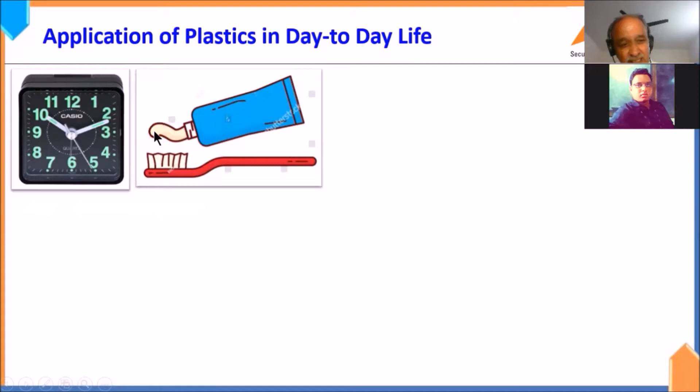In the morning, a person wakes up, and you may see that the clock shows 10:10 because that person has had a long day into the night, so he has set the alarm at 10:10 probably. It's completely made out of plastic. Then he brushes his teeth using nylon bristles and a plastic handle, and the tube containing the paste is also made out of plastic. And then he takes a hot cup of coffee in the plastic mug.

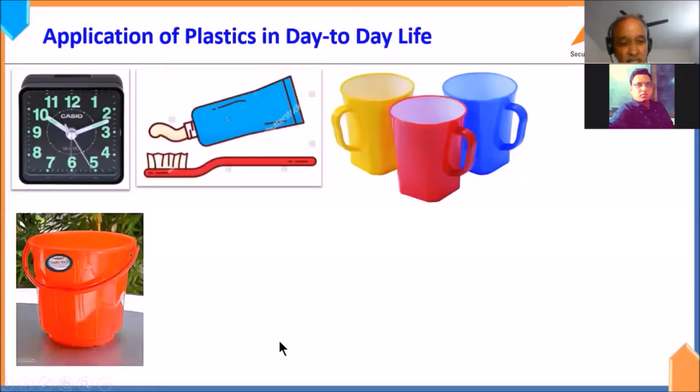And then he goes for a bath. This is a plastic bucket, he uses a plastic mug, and of course the soap case is made out of plastic. And he uses his cell phone extensively, which is made out of plastic. And the material of the clothing that we wear is probably mostly out of synthetic material. And the shoes that we wear, these non-leather shoes, are made out of high-strength fibers of plastics.

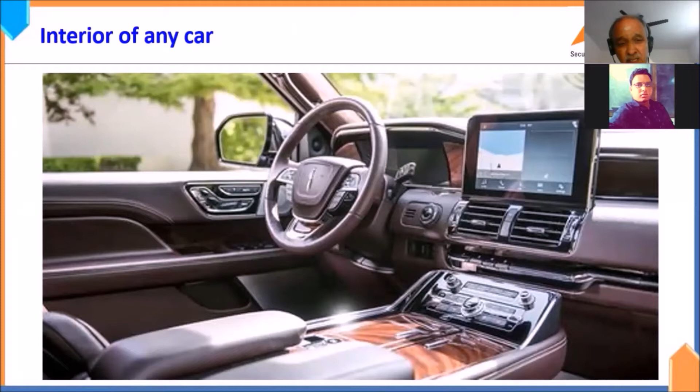Thus, we come to a conclusion that it is impossible for us to lead a modern life without plastics at all. And if you open the interior of any modern car, you will find that everything is entirely made out of plastic. And if you completely dismantle a car and put it out like this, excepting the body parts which are made out of sheet metal, most of the parts are made out of polymer, including rubber.

And what are the advantages of plastics? Why is it that plastics is the most preferred material? Because of several reasons. One is it has got lower density compared to steel, for example, or metals. So steel has got a density of 7.8 specific gravity, whereas this is just around 1. And you have to protect steel against rusting by painting or plating. Here, you don't have to do anything at all.

And if you want to improve the aesthetic appearance, it could be painted, and it could be made transparent with some special materials. It can replace glass at a lower weight, giving the same transparency for headlamp hoods. And they are very easily processable because of the lower melting temperature. And they are durable for the life of the car, absolutely no problem at all.

Earlier, we used to have bumpers made out of steel. That was thought to be a protection for the car. But then we learned that we need a material which will have high impact toughness—when the impact comes, it will absorb the energy and spring back to its original condition. That is why the modern bumpers are made out of plastic, and they can be joined easily by welding.

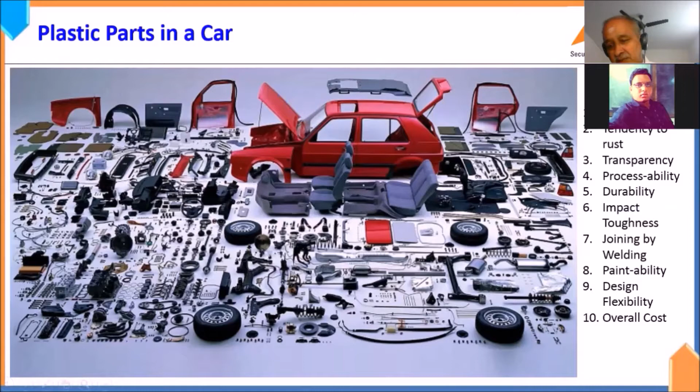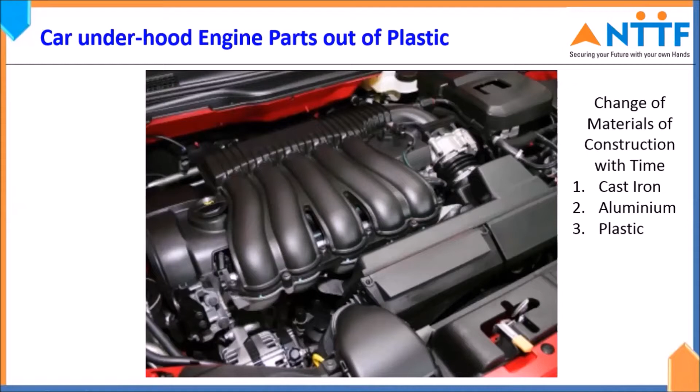Now, if you open the bonnet of a car, you will see so many parts made out of plastics. Earlier, they were made out of cast iron, then we changed them to aluminium. I started with Bajaj Tempo, the manufacturer of four-wheelers, in 1964.

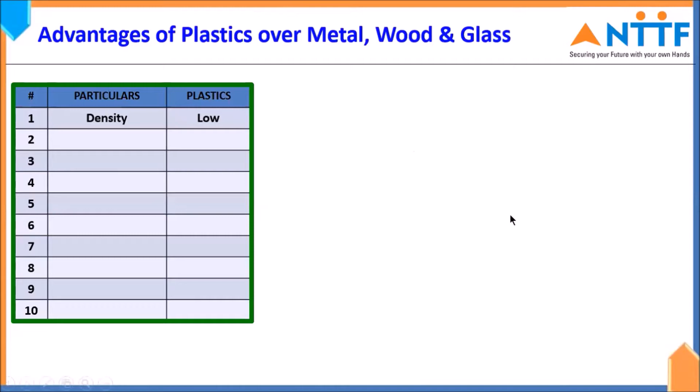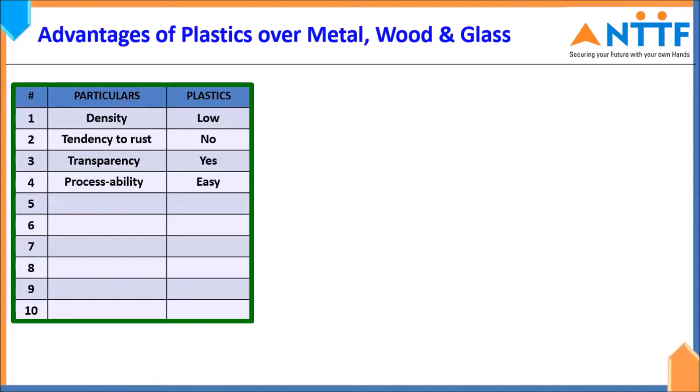So I saw the gradual changeover of materials from cast iron to aluminium and then to plastic. What are the advantages of plastics over metal? Density of metal, let us say steel, is 7.8, whereas plastics around 1. So tendency to rust is not there at all, transparency possible, durability quite sufficient for the life of the car, lifelong I would say. Impact toughness is excellent, joining and welding is very easy. Paintability is not required most of the time, but if you want to enhance the appearance, it can be done. And design flexibility is superior, and overall cost much lower.

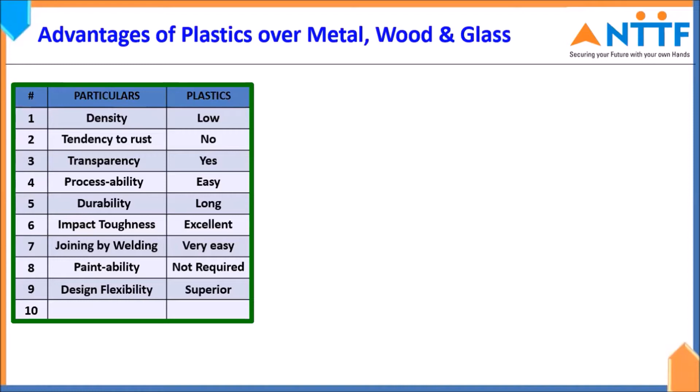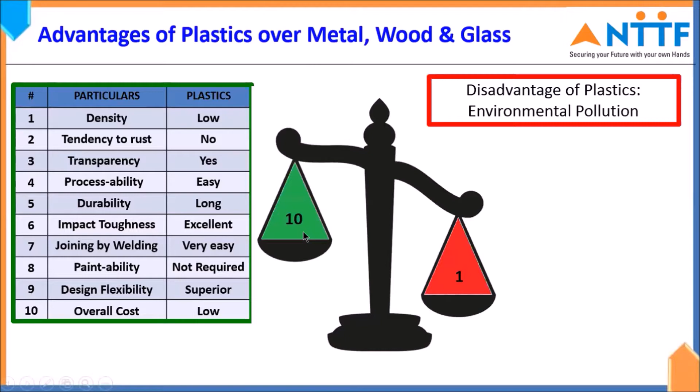So these are 10 advantages. There are many more, I just selected randomly 10. One single major disadvantage of plastic is after its use, when it is discarded, it creates environmental pollution. So there are 10 advantages and one countervailing disadvantage. This outweighs that. Now we'll see one more slide before I close.

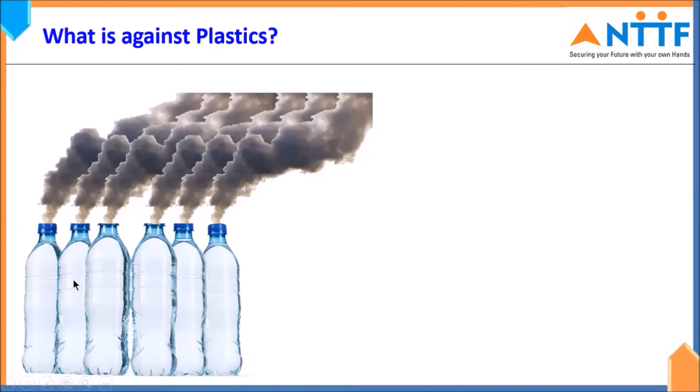What is against plastic? The low cost, use and throw away plastics only cause pollution. It is not the high cost, high value plastics used in cars that cause pollution, they can be reprocessed easily. Whereas the low cost ones, made in millions every day, end up in oceans and waterways and cause major pollution. This is something which is subject to research, and one of these days we will be able to address this satisfactorily to the satisfaction of the whole mankind.

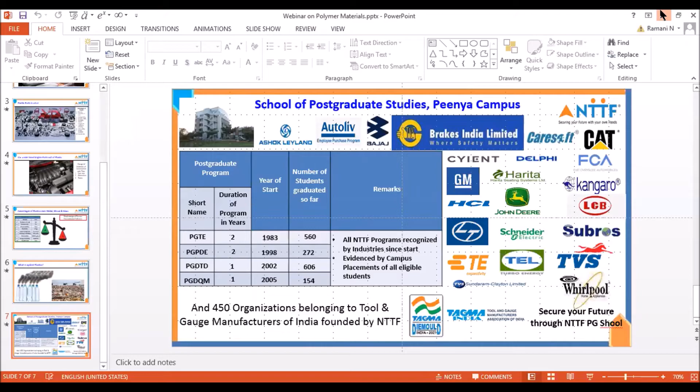Hello, good morning to all participants, and thank you for the wonderful introduction and very good cue from Dr. Ramani. So I consider it a good opportunity for sharing some analysis on this particular topic. I'm going to help you think or analyze how the selection of plastics can be made, so that has got a journey to make. In the course of another half an hour to 45 minutes, we'll be covering it, and I would be able to give you the way how we can do it easily.

As Dr. Ramani put it in the earlier session, plastics had been used in almost all applications. It is difficult to identify any sector where plastic is not used, except eating. You have used plastic everywhere. There is no single minute in our life, at any time in the day, that we don't come across plastic. Plastic had been so much used in the atmosphere around us, whether it is medical, footwear, packaging, building and construction, electrical accessories and electronics, transport, agriculture. In all these sectors they are used. Obviously, there must be properties which are really beneficial for using in all those sectors.

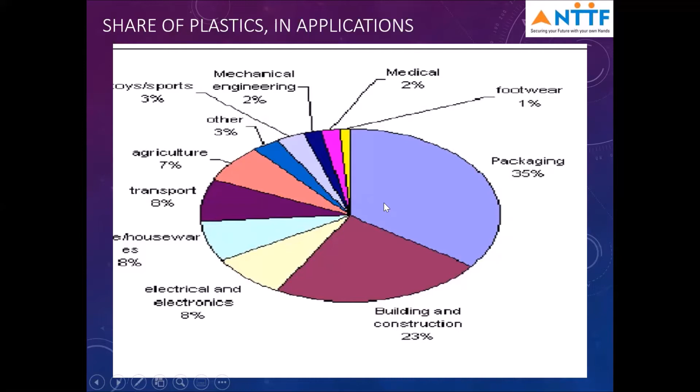Whenever people design a product, it is always a challenge to select the correct material. If plastic had been occupying these applications, there must be properties which are friendly. And of course, as put in the earlier session, in some applications, because of excessive use and to an extent a kind of irresponsible abuse, it is creating a lot of ripples in society. It's only a question of getting alerted, and of course technologies are developed to reprocess those materials. Let me not get into that particular area, which is interesting but has a lot of controversies. So why should we use plastics?

Already a lot of the features are listed. Something interesting is that plastic has highly complex part geometry you can design, a very complex part geometry. There are some part geometries which, if you don't use plastic, you cannot manufacture that part. Plastic is the only choice. So that way, that gives an advantage. And with the level of technological growth now, with the advantage of CNC, CAD and CAM, where a design can transfer from different points even across the world easily, the complexity is no more an issue.

A lot of efforts are made to develop plastics in a very interesting condition. There is one point about hygienic and clean room atmosphere parts. Now in COVID times, we are more worried about growth of germs and viruses. It is possible to make plastics which can resist that kind of atmosphere, that kind of threat or attack from virus and bacteria. I will tell you later how this is being addressed now.

The other properties are already known. One thing fundamentally we have to realize is, if any geometry you are designing by a plastic part, there can be no other material which can give you that at the same cost. So for any geometry, plastic is the cheapest option, provided you know the advantages of plastic and the constraints.

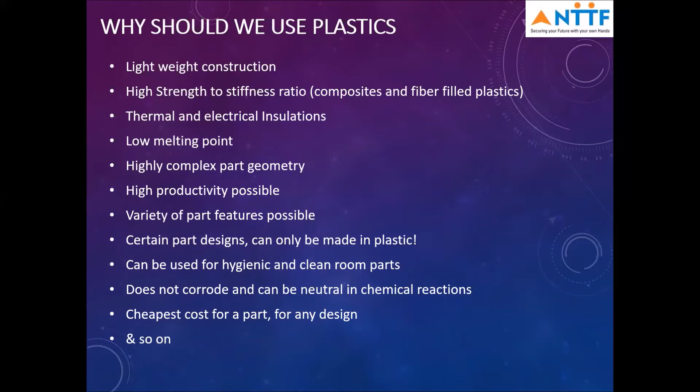Suppose you want electrical connectivity between two points, then it is not a good idea to use plastic, because plastics are insulators. And if you want heavy weight added, plastics may not be a choice, because plastic is a lightweight construction. Suppose you have an application with high temperature involved, 150, 200 degrees centigrade atmosphere. Then there have to be special grades of plastic, or you have to go for alternative choices of materials.

Let us see down now, I'm going a little faster. When we try to analyze plastic, actually a big group of plastics are available around us. We have seen many applications. For our sake of simplifying things, we have to start classifying.

So any basic volume of material you have, the best way to select what is suitable to you is to classify as much as possible. It is something like in a classroom when the students are there, we will classify students into categories like boys and girls, or localites and people from outside, or students who score more than 80, or 60 to 80, or 40 and above, and those who have a tendency to fail because they have some similarity within them.

Here we say commodity plastics is one kind of application. Engineering plastics is another category, and special performance or super plastics is another category. Let us see what is the exclusivity there. If this classification is clear, when we are selecting, we can lay our hands on the right type of plastic that is suitable for us.

Commodity plastics are known because they are low strength material. You can almost break them with less force, and they have a low melting point. What does low melting point do? It leads to better processability, meaning you can supply less energy and melt it. It is a low cost material and easy to process. Overall, when the processing is easier and the material cost is lower, the part cost will be the cheapest.

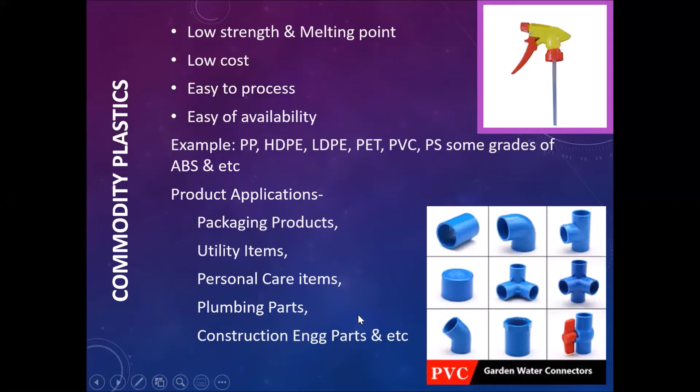Construction engineering parts, where houses built these days are using excessive plastics. Engineering plastics, with respect to commodity plastics, have high mechanical strength and are relatively expensive and difficult to process. Because of this, the part cost goes high.

So there, the category of plastics are fairly expensive, and they can be said as nylon, PC, POM meaning polyoxymethylene, which is also called acetal in the general market, and polyphenylene sulfide. I have only listed a few which are frequently around us.

Nylon, if you know very well, was launched by DuPont several years before, and this very word nylon actually means New York to London. So they made a fiber. The persons launching it said to the world, we can make one fiber which covers the distance from New York to London in a single stretch. That is why they named it nylon. So nylon became a very familiar material as far as fibers are concerned.

Nylon fabrics came, and it is a very thin material that can be drawn into thin fabrics. Engineering plastics are used in connector parts, automotive engineering parts, instrumentation parts, where you have strength as well as a little focus on cost. But in commodity parts, cost is the primary criterion.

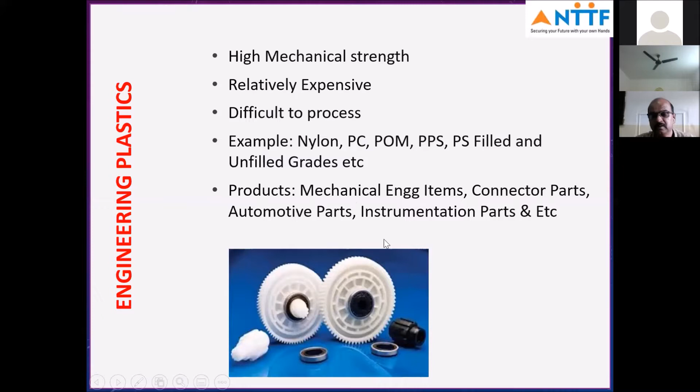You have already seen so many parts being used in the car. It is increasing on a daily basis because plastics are being developed to handle a lot of the complications of atmospheres in that.

Then comes special performance plastics, also called super plastics or high engineering plastics. These plastics are specially categorized because the properties are exclusive and customized. How do we customize? We will see a little later.

I will share one or two pieces of information later. They have got strong thermal properties, meaning they can withstand a little higher temperature. Imagine an exhaust of a vehicle is now manufactured using a particular plastic - exhaust temperature of gases are very high. Earlier it was considered only a metal domain; now that is replaced by plastic.

The advantage of using plastic is not because it can withstand the temperature, it's because of the reduction in weight. Always in a vehicle, the target is to reduce weight because weight reduction brings better mileage and less fuel consumption. That is what the world is thinking. So if plastic is not the material there, no other material can fill this space.

Customized properties are possible with these plastics. They are difficult to process and they are expensive. They are all special performance plastics.

Some of them, if I can tell - PTFE, most of you must have heard, is actually used for non-stick pans, this is the coating they do. And polyether ether ketone (PEEK) is a very special grade of plastic, but they are very expensive.

Expensive means I can give you an idea - it will cost somewhere around 2,000 rupees per kg. Commodity plastics will be somewhere around 40 or 50 or 80 rupees per kg. Engineering plastics will be touching around 200 rupees per kg at current prices. But PEEK and PTFE will be somewhere around 2000 rupees plus.

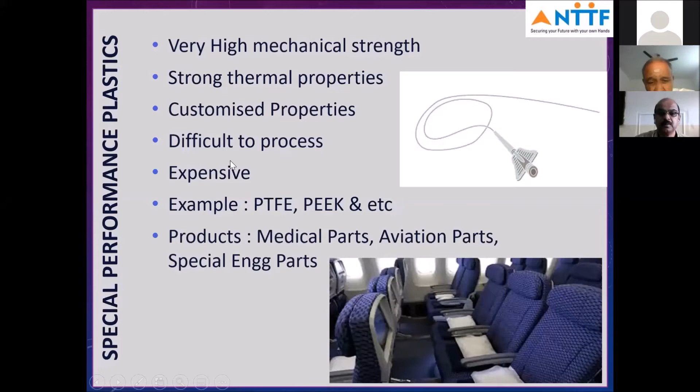In thermoplastics, we have two main categories: amorphous and semi-crystalline. Amorphous means all the fibers are randomly arranged; semi-crystalline means they are similarly arranged. Based on these two, certain properties emerge - for example, light transmission. In amorphous material, photons do not get reflected back, they pass through. In semi-crystalline material, the crystal arrangement reflects light back. Amorphous material, when melted, has a longer processing range because it doesn't change phase. Semi-crystalline has a phase change - when you cool it down, at one point it solidifies and you cannot process it further. So semi-crystalline has a narrower processing range, which influences your selection of plastic.

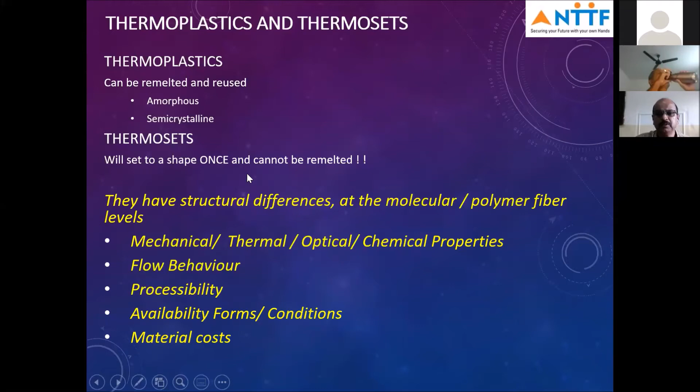So this is one kind of classification we've seen - the earlier one was a diagrammatic representation. Look at the range of thermoplastic parts you can make: knobs, caps, and bottles, all from the same input material in grain form. Look also at trays and chairs - all these parts are made from the grain form.

This material can be colored - plastics can be colored. Imagine a house with 10 people, all keeping soap trays and using the same soap. How do you separate which soap is yours each day, so it isn't used by somebody else? The same tray can be made in different colors, and that way you can differentiate them.

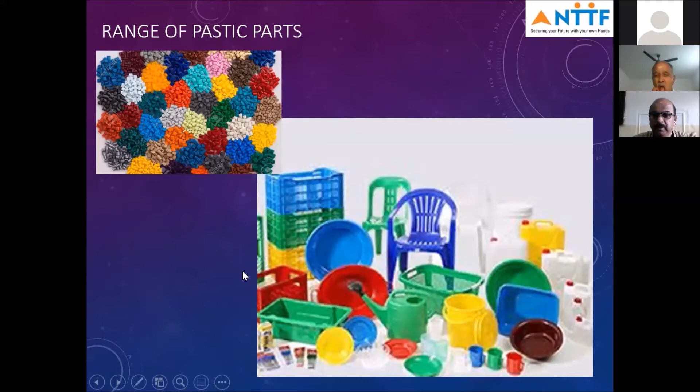Automotive connectors - the connectors electrically conduct signals. The connector used for operating the light should not be used to operate the sensors or the wiper. When you want to put on the light, the wiper should not come on. So you can separate and differentiate by coloring the parts. That is advantageous.

Look at this part - this is a commodity item, a comb of different design. Can you think of this feature in any other material? In earlier days, combs were made of ivory, so one comb would cost several thousands. Now it's banned, as we know. People like Veerappan killed elephants to collect ivory.

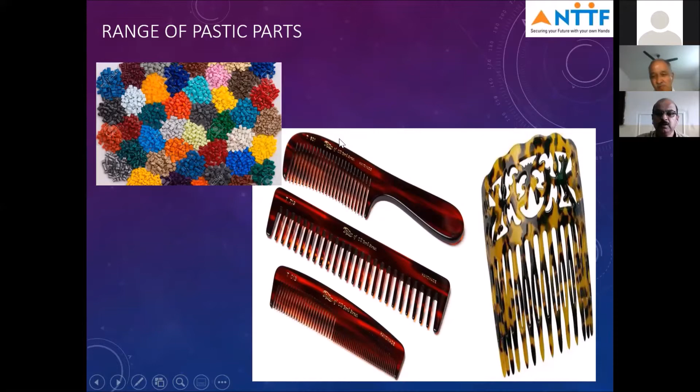Look at this - some are engineering parts: a telephone headset, cables, specs, balls, spoon, bottle, and zip - all plastic. This is another category, all with raw material in grain form, though some will have intermediate forms in between. What I'm trying to say is plastics are so pervasive that there's not one minute in our time we don't come across them.

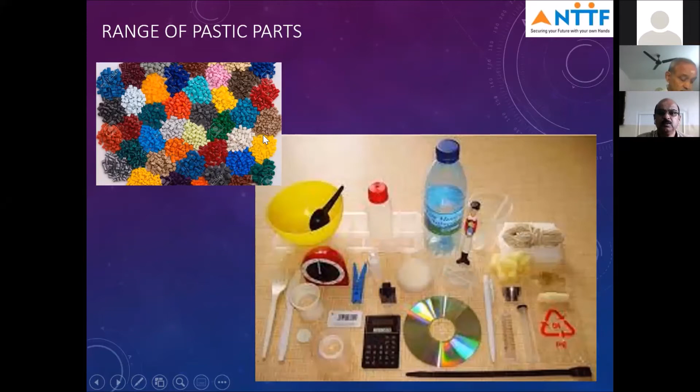This category covers thermosets and elastomers. Thermoplastics are those you can remelt and reuse. Here, this is a material category called thermoset - you apply heat and it gets solidified. This is rubber material.

This is the same thing. You apply heat, you can change the shape, but you cannot change it again - they are set to the shape. Maybe you can cut them and use it as waste and scrap material, or for road pillars or construction applications, but that cannot be reprocessed like the earlier category of plastic called thermoplastics.

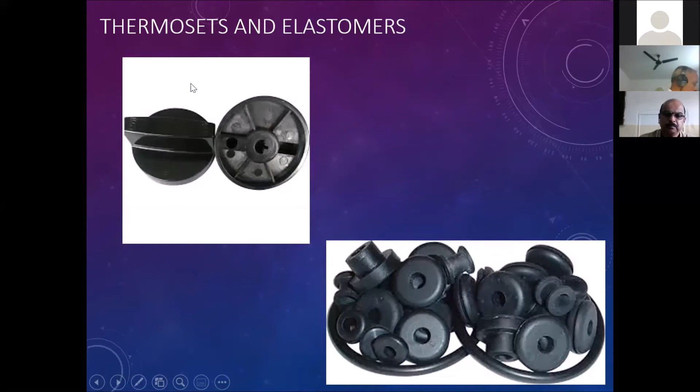The product designers have to provide this in a place where you are not going to make it functionally disabled.

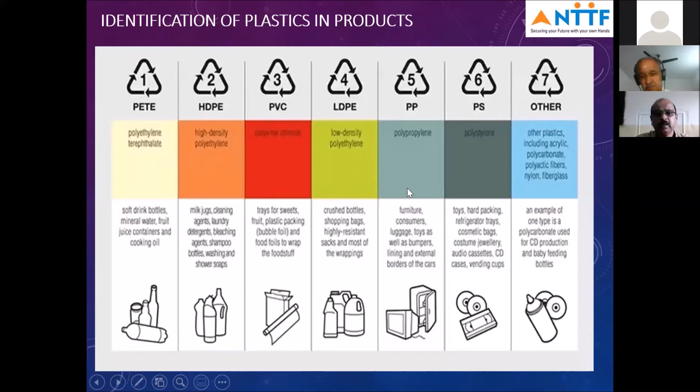As I said in the earlier session, the structural arrangement inside will change the properties of the plastic. What is it leading to? It gives different varieties of plastics.

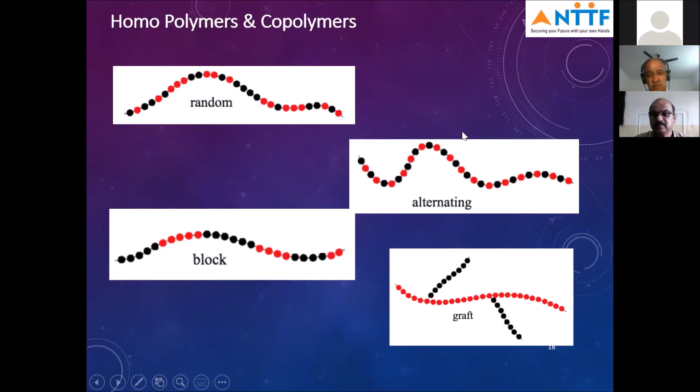Polymers after polymerization are not fit for use - directly, they are not fit for use. So we will have to make them useful. For that, material engineers are adding additives. There are some interesting additives.

Anti-counterfeiting is possible - suppose you are manufacturing a part suitable for medical use, where the material is special plastic. If the vendor is changing the material, you can have a coloring tag or an RF tag on the material, so when you process it, you can check the part for the presence of the tag element. So you can do anti-counterfeiting, and antimicrobial so bacteria will not grow.

You can add antioxidants, which will actually reduce oxidation. Anti-static - ESD is a bigger issue. Static electricity is very dangerous in many products, especially electronic circuits - that kind of shock, an electrical surge, the products will not be able to handle. So the plastics, being insulators, are basically static-electricity friendly, and you will have to make them compliant - you can add additives to make it ESD compliant, static electricity compliant.

Then you can have blowing agents where you want to blow the material into a bottle, a lid, or a can - you need the plastic to be stretchable, so you can have blowing agents. You can add lubricants inside the fibers so that they will flow well. You can have colors, and you can have processing aids, because plastic can be processed in many ways, which we'll see later. So for all those, there are definite properties required in the plastic.

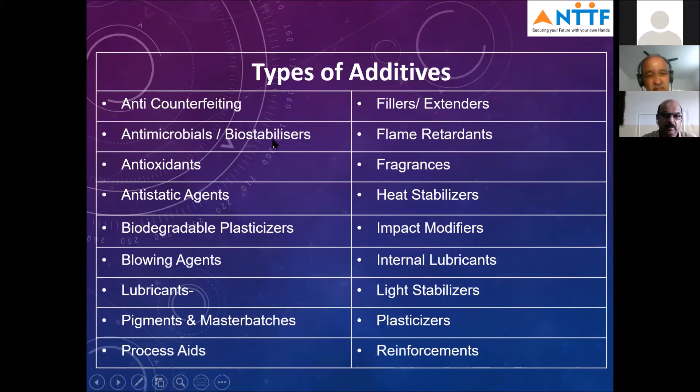Polycarbonate is a tough material. You can add some soft material like acrylic, or you can add a hard material. So optical transparency as well as polycarbonate's impact toughness will come together in the product. Like that, you can blend the polymers.

But of course, we will have to look at whether they are compatible. All plastics cannot be blended with all kinds of plastics. We will have to rate them on compatibility.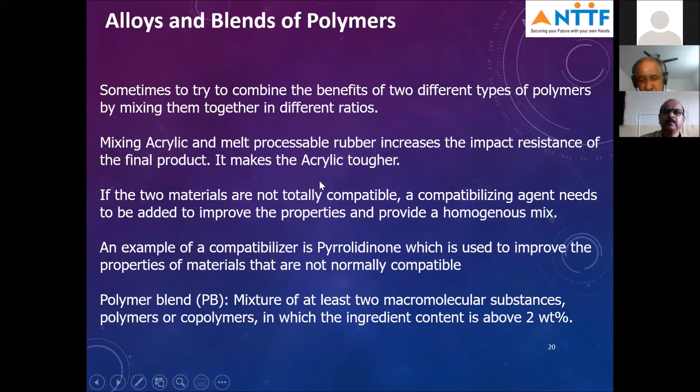So how are we processing plastics? Now we know very well that varieties of plastics are available and they are classified into different categories, each with distinct properties. So almost all plastic processing methods have similar approaches.

You heat the plastic, particularly thermoplastic, and you are ready to give it a different shape. In that condition, you cool it and it settles, and the shape will be retained.

So if you force it with injection into a chamber and allow it to cool there, it becomes injection molding. If you take thermoset plastic materials, load them into the tool, and start polymerization, it becomes compression molding.

And if you heat the plastic so it becomes soft, at one point you can blow air, and the plastic will expand like a balloon. So bottles are made with this process, called blow molding.

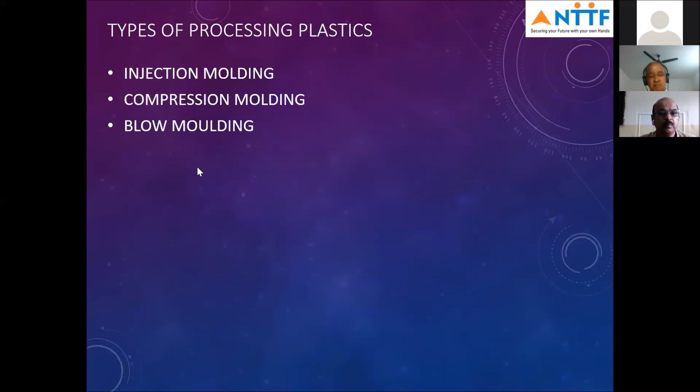You blow air. Thermoforming means you are giving a shape to a sheet of plastic, which is manufactured by extrusion. That sheet is actually given a shape.

So thermoforming is a process where we heat the plastic sheet and put it onto a die, then suck or blow air. It will take the shape of that die we have made.

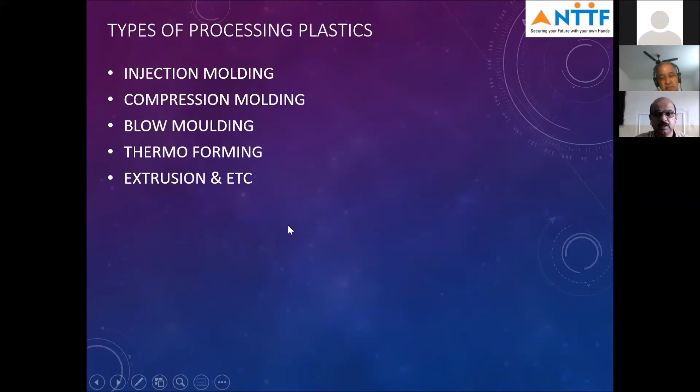So thermoforming and extrusion give different sections. Otherwise, without extrusion, we would not have had so many cross sections of PVC available for construction applications. There are many more varieties, but I'm only limiting to this particular one.

So why is injection molding more preferred? Because if you look at almost all the parts, injection molded parts represent the largest variety of plastics produced and consumed. Even though weight-wise they are less, in value terms, volume, and varieties, injection molding gives the advantage.

So you can produce from simple to complex, rigid to flexible, transparent to opaque, small to large. You can have parts with holes or with spring action, like a mobile cover, or a bottle with a lid. These are all simple and complex parts.

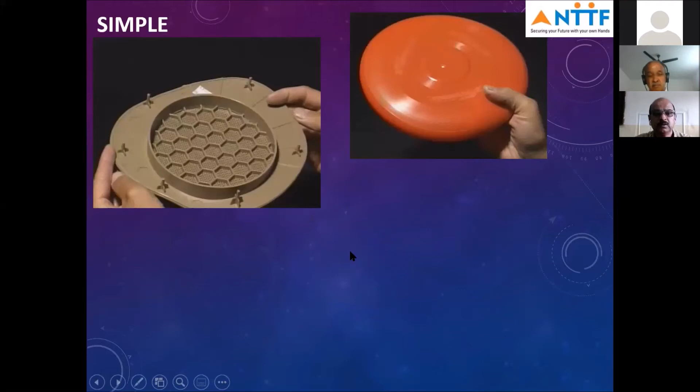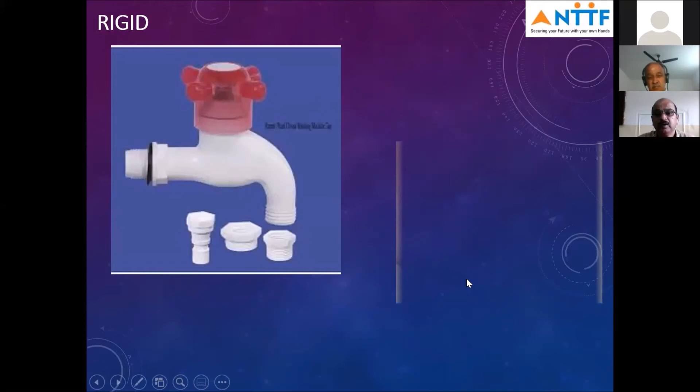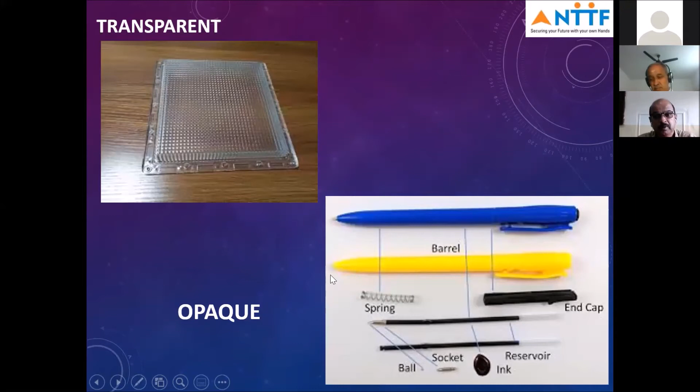These are all colored parts of a pen. You can have transparent ones too, all molded by injection molding. And then small parts used in watches, these are all used in instrumentation.

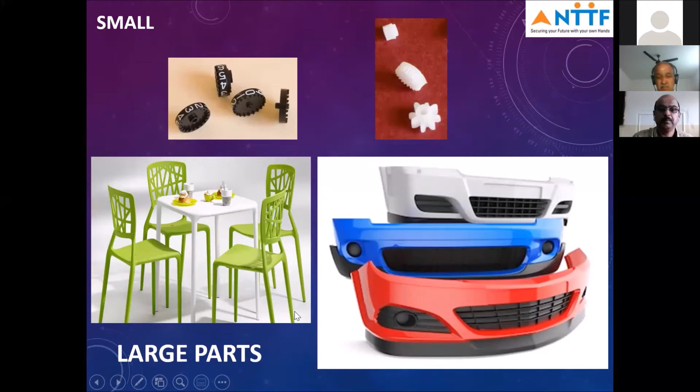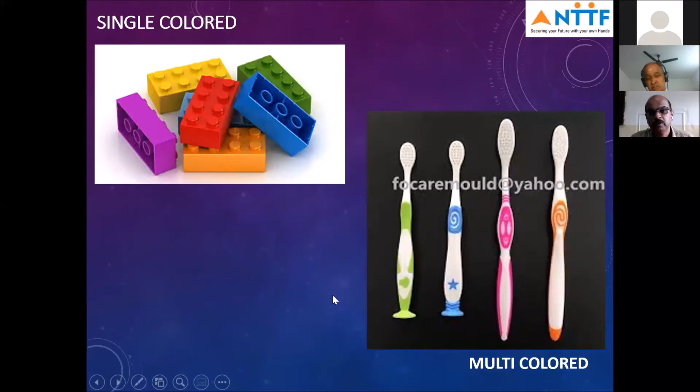Then comes single color Lego blocks, shown here. All of these are with different materials, and this is multicolored, meaning in the same part you can have two materials loaded into one.

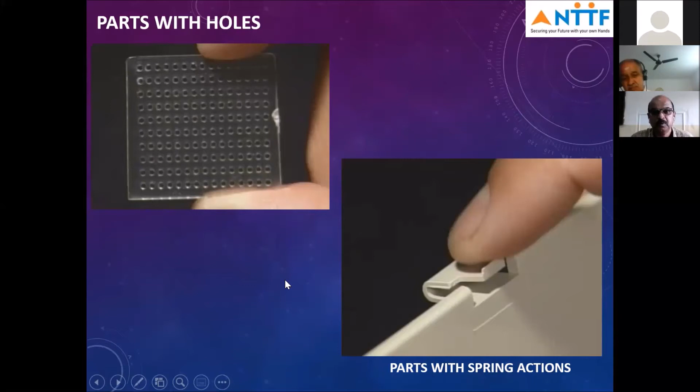Then come parts with holes, like filters, and this one has spring action. So these are all injection molded plastic material. So what does injection molding mean? In simple terms, melt the plastic, force it into a chamber shaped like the part, then allow it to cool.

That will give the part its shape, so when it solidifies, the shape of the part will be set. Of course, there are issues involved. Not everybody can design a tool because it has to prepare the material and give the shape of the part, whatever the design looks like. So it's a very complicated, very challenging, and very interesting field as far as injection molding tools are concerned.

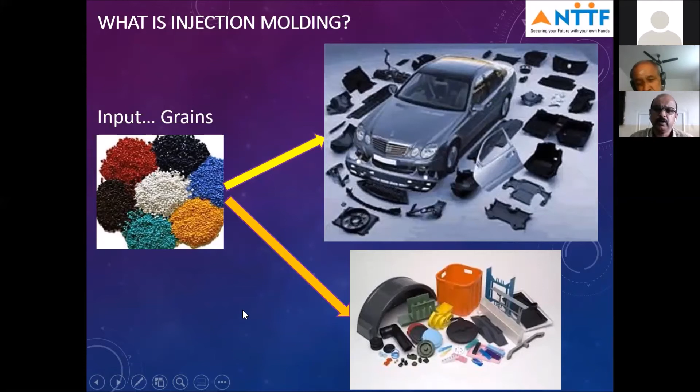Injection molding means melting the plastic granules. The granules you have seen here are the input material for injection molding. They are all melted by the machine, which becomes a plastic melt, ready to flow like a liquid, and that maintains a consistent temperature.

Then you are forcing it into the cavity in the tool. The impression of the part, a replica of its shape, is created in an arrangement of the tool. Sometimes the tool is so challenging and so expensive that some tools cost more than the machine. The machine may cost 40 lakhs, while the tool will cost somewhere around 50, 55, 60 lakhs. That is the type of technology that goes into the tool.

Tool building is similar to building a machine these days. Why has it developed like that? Because of the development of molding tool technology, designers are able to think of wonderful shapes for the plastic part, and because plastic can take those shapes, it is possible to manufacture the part. So part designers have got no limitation now. They can design anything, and the injection molding tool can help them manufacture that.

After filling the cavity with the high pressure material, you cool the melt, because plastics need to be cooled for solidification. Of course, there are issues like the size of the molded plastic versus the size of the solidified part being different. Tooling engineers take care of these size differences and maintain the tolerances, and you can produce in mass. There are situations where the tool produces in one shot 128 small parts—so much of that technology it can take on.

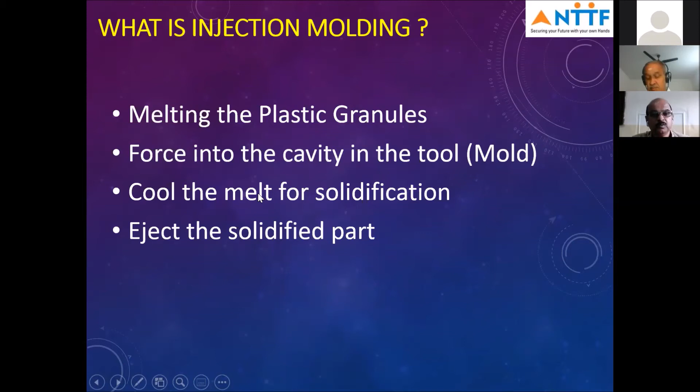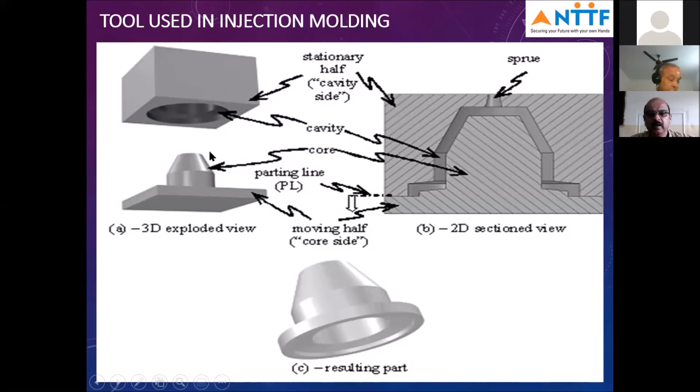The tool cools the part, and after opening it, you can eject the part like this, so the finished part will be of this shape. This is a simple conventional example of how the tool works—this is the core area, which gives the internal details of the part.

On the top side, you have the external details of the part. It's called the upper side or lower side, or the fixed half and moving half with respect to the machine, because this half moves every time while the other is fixed to one plate of the machine. There is a pocket here with an ejection mechanism, so after the tool is opened, the part will be ejected.

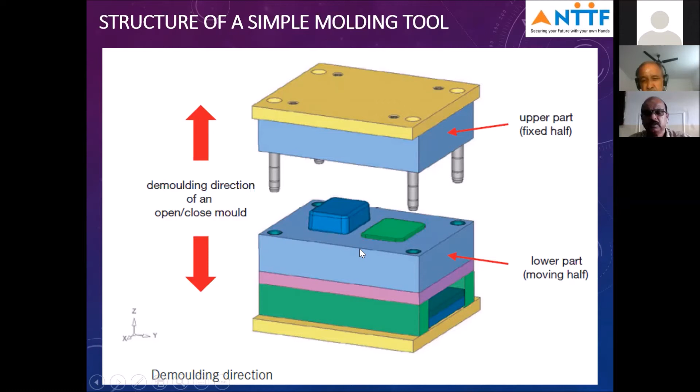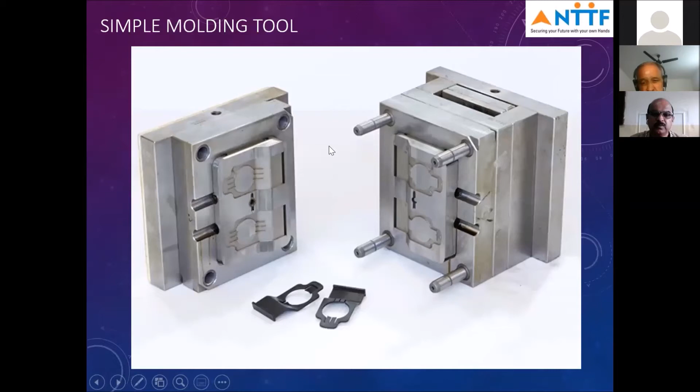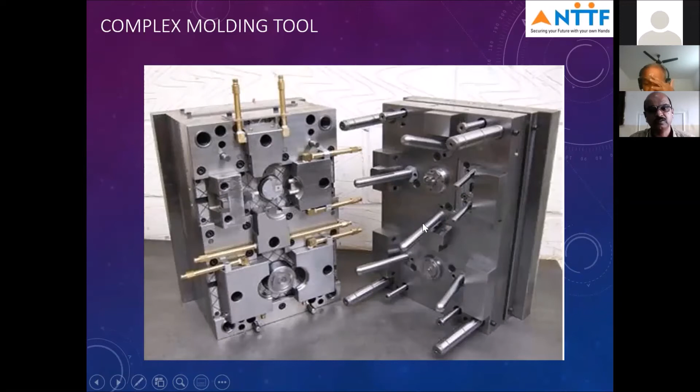That is why I said tool making is not a simple activity. It's a special process. But as a process, you need to know.

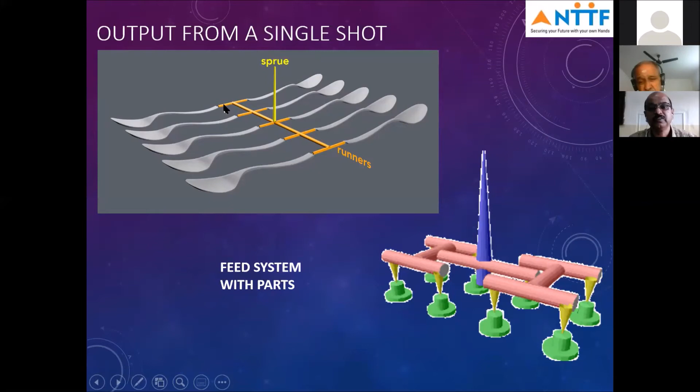So this is actually a mold of a thermoplastic. This is the spoon manufacture. This is an area where the material enters into the chamber, and this is called the sprue. This can be recycled, that's what I said, we can reuse them. So that is the advantage of thermoplastics.

Then comes, now let us come to the final stage. It is almost reaching the final stage of the matches. I told you more than 30,000 types of plastics are available. Is it an easy choice? It's not going to be easy. But the categorization, the study of the property, the study of the application will help you better.

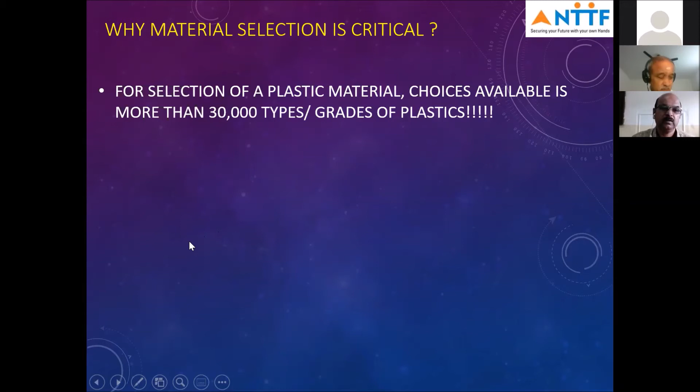Let us see what is the way we can do that. Whenever we have got so many choices, I remember one situation. There was a textile company which was very strongly contending in the market. They launched men's fabrics for pant and shirt, trousers and shirts, with more varieties than the market leader. The market leader had only 3 or 4 colors of pant material, these people launched 10 colors.

But actually, you know what happened? The people, because the choice was too many, stopped selecting it because they were not able to select. But the company offering only 3 colors, they were able to get that. So what I'm trying to say, when you have got more materials, your choice should not become complicated.

But there is a science to select. There is a method, there is an approach. So we can select, because the exclusive materials are meant for applications where you will be very, very comfortable with.

Suppose if you do a mistake in selection of material, what will happen? It may not be economical. The economics will go up, or it may not even meet the design intents. The part, whatever the designer has planned for it, may not work.

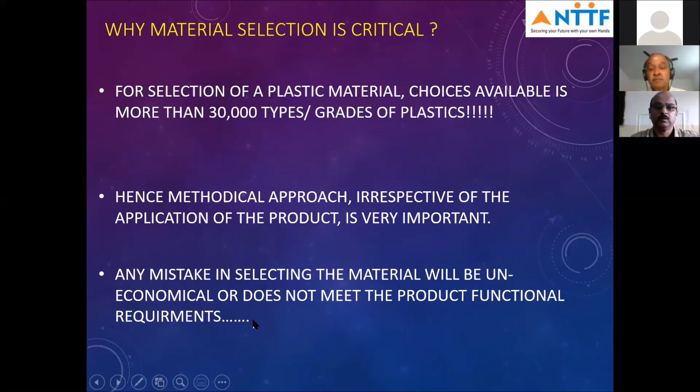It is something like you are producing the body of a car voltage stabilizer by using fabric cloth. Will that work? It's not going to work, it's not a recommended one. So that way, we will do a mistake.

So what are the factors affecting the selection of polymers? We have to see the mechanical factors. Mechanical means almost functional, type and magnitude of the normal service. How is it served in the shop?

For example, if you take a simple product like a toothbrush. When you are using it, you are pressing the brush against your teeth. The teeth will not break, but the brush should not break the teeth. So it should be flexible enough. That is the type of service we need. It should be flexural, it should have a spring effect.

And how are we loading? We are not loading by, 2 people are not brushing one set of teeth. So one person is brushing, it should be designed for that load. How long it is going to take the load. Fatigue resistance, that means how many times it will be reversed. Then deflection allowance, how much it can bend.

And overloads and abuse. Do you feel the toothbrushes are not abused? I have seen some people using the toothbrush for cleaning the sink, for cleaning the table, for cleaning even the washroom. So they use that, so abuse also you may have to design for. You should not design the product in such a way that when they are abusing it, it may break and create accidents. So we have to design the product for abuse.

The material should be selected for abuse. And toothbrush or soap tray, people may drop from a height, it should not break. It should be impact resistant.

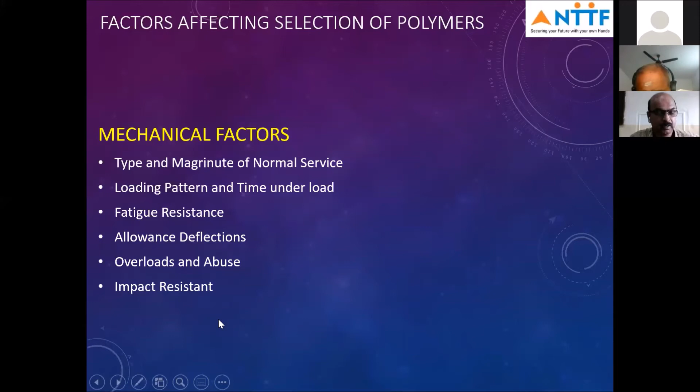Then comes the thermal factor, that means coefficient of thermal expansion of plastics, you may know very well. Compared to metals, plastic has 10 times the expansion. I think most of you may be aware of it.

Plastics expand 10 times. Steel expands almost 11 to 14 microns per meter per degree centigrade, but plastics will expand even up to 200 microns. So whenever you have got two parts made of different material, the metal enclosure with the plastic cover, you will have to remember plastic expands more. So you will have to give scope for the plastic, and whenever you are selecting the plastic, you should know there is a mismatch. The specific heat, that means the amount of heat required to melt the material.

Operating range of temperature - will the plastic part work in a different range of temperature? What product are you designing? There's a range of materials suitable for it - commodity, engineering, and special performance grades. Is it a special performance application? Is it a general engineering application?

Then maximum and minimum service temperatures - what is the service temperature it is working on in regular use? Will it be carrying hot water? Will it be carrying cold water? Will it be carrying insulation? Or what type of materials pass through that? These are all different thermal properties.

Heat deflection means when you apply load at different temperatures, the part will deflect, so the material you select should withstand that. Softening point means when you put a pointed load at a different temperature, the pointer will go inside - that is a test. So the plastic should be tested for that application.

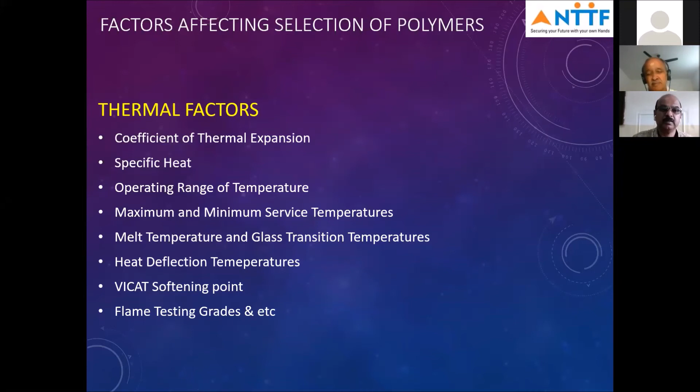Then environmental factors - are we storing petrol? Are we storing hydrochloric acid? Are we storing alkalis in the tank? We should know that.

Will it react? For example, most of you may be aware that when you want to carry petrol, you should always carry it in a PE - polyethylene - bottle. It's a very soft material. If you think polycarbonate is a tough material and carry petrol in it, you know what will happen? After 10 minutes, the petrol will eat away the polycarbonate, because amorphous materials are not resistant to chemical attack. So you cannot use amorphous material - you have to use semi-crystalline material. So you will have to see what environment it's working in.

I have seen some vehicles designed with plastic fuel tanks, because plastics don't have corrosion problems. They do not corrode, they can be made leak-proof, and they make a lightweight product.

Water absorption effects - there are some applications where water is absorbed. Look at the soap tray - do you feel it's a serious factor? It's important because it's kept in the bathroom, not inside a fridge. It is kept in the bathroom. So what will happen if the water is absorbed, or what will happen if the water stays there?

Bacteria should not grow. Imagine if the material is used in a medical application inside an operation theater - can you have a plastic which, with the presence of moisture, will grow fungus? You cannot even think of it. But plastics are available that you can customize - you have seen additives added - you can get that particular grade.

So that will influence things. UV light exposure - you know how dangerous UV light is. If you just test it yourself, take a tumbler and keep it exposed to the sun for one week, and you will see it rupture and break up. But the same, almost similar material, is used to make parts of an automotive two-wheeler. You park it outside, but will the outside handle cover break? Because they are made with UV light inhibitors, it will not damage the plastic.

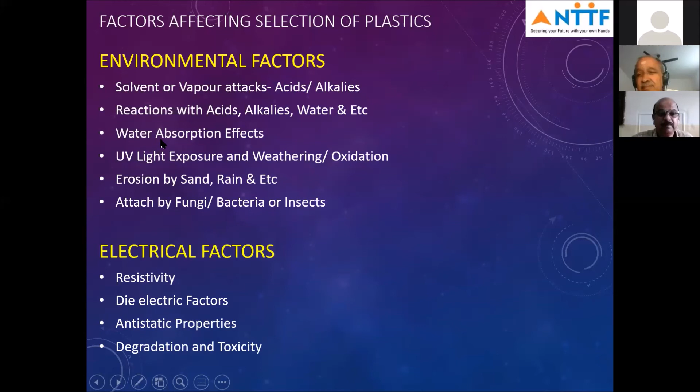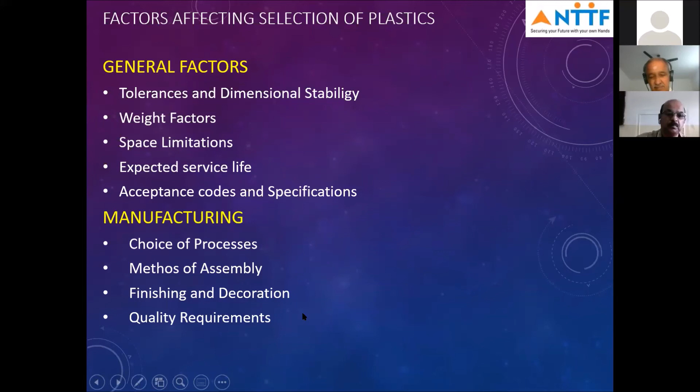So what are those quality requirements? What is the quality level? Can this plastic give that kind of quality performance? Ultimately, this is what the business is worried about.

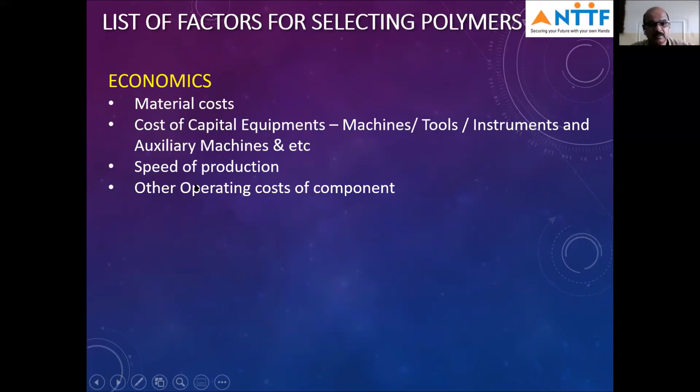Material costs - what is the cost of the material? There are three categories of cost, since you have different types of plastics. Ingredients added change the cost of the material. Then there's cost of capital equipment, because for processing this material, you have got so many things to consider for that cost. So these are all influencing your selection.

Now you know material selection is such an interesting, simple, and complicated step. Let me show you how you select. Now this is the climax of this stage, where you can develop your own approach as to how.

The first stage in the selection of material is to list and analyze all the functional requirements with respect to plastic - engineering design meaning strength, aesthetics meaning the look of the part, manufacturing guidelines meaning can you manufacture by molding or blow molding, quality requirements, storing - how are you storing them, how are you transporting them - all these will help.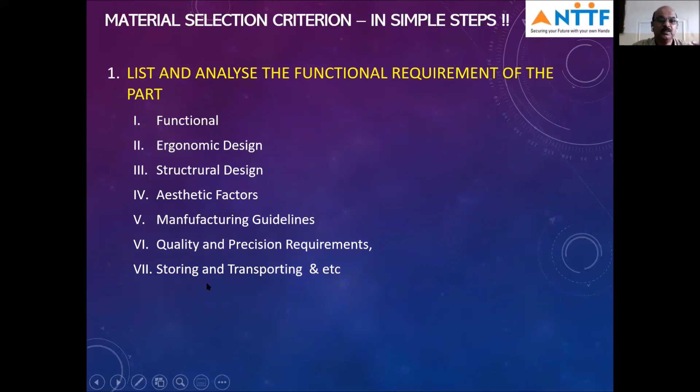Range of material - how are you manufacturing the part? Do you need blow molding? We will have to see the processability, since all materials are not processed by all processes - we need to remember that. And final cost - that means in selection, the requirement, processability, and the cost all matter.

Suppose if cost is the priority, then it becomes the primary consideration - like the outer cover for the leg of a commode. But for an engineering part, suppose a gearbox, a transmission element - cost is one factor, but function is important. For special performance applications, function is important and cost is ignored - they are ready to pay even 2,000 rupees per kg. That is how the categorization works.

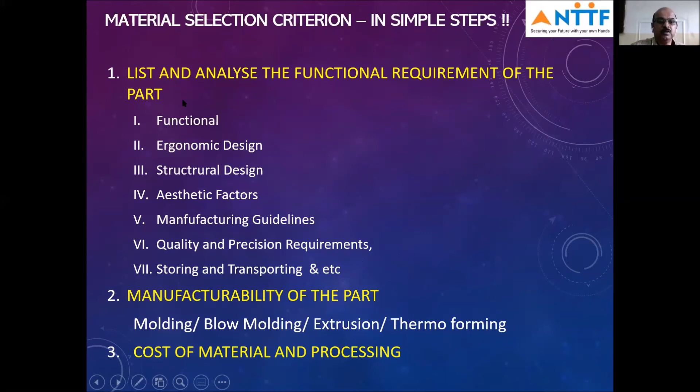So suppose we take one simple example - I will come to this manufacture. Let us see how we list the functional requirements, right? Because you cannot just make it up.

Soap, when you are using it, should be protected, and it should not allow bacteria growth, because you use a plastic material where bacteria can grow, and when selecting tomorrow, people want frequently different designs and sizes. Materials should be possible to process into different designs, different geometries.

The soaps are not available in standard size - I got a 25 gram soap for 2 days use, and at home you have got family size 150 grams. The soap tray should be able to handle that kind of size variation. So you should be able to handle it, and when you are handling it, you should be able to reach the soap very well, and you should be able to pick them up.

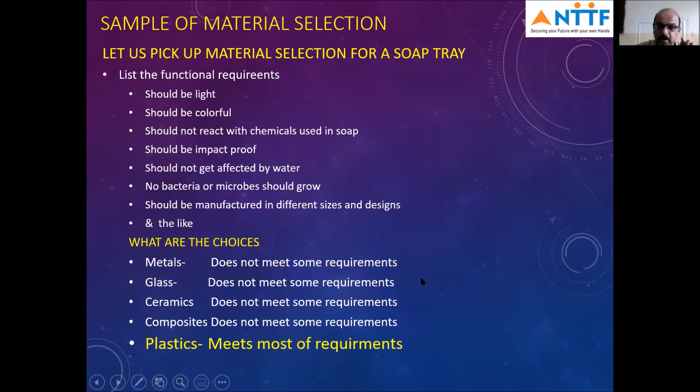And remember, to conclude, I just want to tell one simple statement: there are different materials for the same process and same application, and the same material used for different applications.

It is something like vegetables. The same vegetable is used for many applications, many dishes, and for the same dish you can use many vegetables. The choice depends exclusively on the analysis of the cook who does it.

There are some choices which are very helpful, and some which are very dangerous. Suppose you are making a sweet, you want it to be very friendly, hygienic, and nutritious. Garlic is a very good material for food — it has got medicinal qualities. But you cannot think of adding garlic to any sweet. That would become a dangerous choice.

You cannot use that. So as a material selection process, we need to know the functional requirements, the do's and don'ts. Like in the soap tray, when you use glass, imagine the consequences.

This way, material selection, particularly for plastics, may happen day to day or once in a week for an engineer. It may not make much difference as far as manufacturing or the selection of material goes. He looks at how they are processed, what type of material it is, whether the customer accepts it, and whether the design intents are met. All these help the material selection become a better, more scientific choice.

There are two types of programs. One is the PGTE, postgraduate degree in tool engineering. It's a 2-year duration program started in 1983. So far, 560 graduates have come out of this, and they are gainfully employed throughout the world.

Then we started a 2-year postgraduate degree program in product design and engineering in 1998. 272 students have graduated so far. Then we have a postgraduate diploma program in tool design, started in 2002, from which more than 600 students have graduated. The popularity of this program is that within 1 year of your BE, you get employed well in the industry — that is why it's popular.

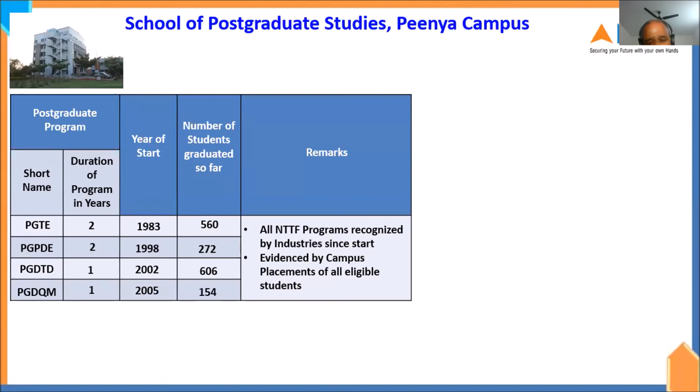We started the Postgraduate Diploma in Quality Engineering and Management in 2005. So far, 154 students have graduated from this program. All NTTF programs are recognized by industries since day one, as evidenced by the campus placement of all eligible candidates.

Industries that come to campus for interviews include Ashok Leyland and Autoliv. Autoliv is the world's largest automotive safety equipment manufacturing organization, and more than 60% of India's automotive demand is met by this Swedish company, which is located near Bangalore.

Other companies include Bajaj, Brakes India, Caresoft Global, Caterpillar, CN Technologies of Hyderabad, Delphi TVS, Fiat, General Motors, Harita, and Kangaro in Punjab, who are one of the world leaders in staplers. Also HCL, John Deere from Pune, LGB from Coimbatore, L&T, and Schneider Electric.

Subros from Delhi is India's largest manufacturer of car air conditioning equipment and electronic connectors. Also Turbo Energy Limited, TVS Motors, where 14 to 20 of our graduates work in various departments, Sundaram Clayton, and Whirlpool.

NTTF started a movement called TAGMA, the Tool and Gauge Manufacturers Association of India, in which 450 tool rooms and manufacturing organizations are members. They are familiar with the name NTTF, so the moment a vacancy arises, they call the PG school asking for placements. You can secure your future through NTTF PG school.